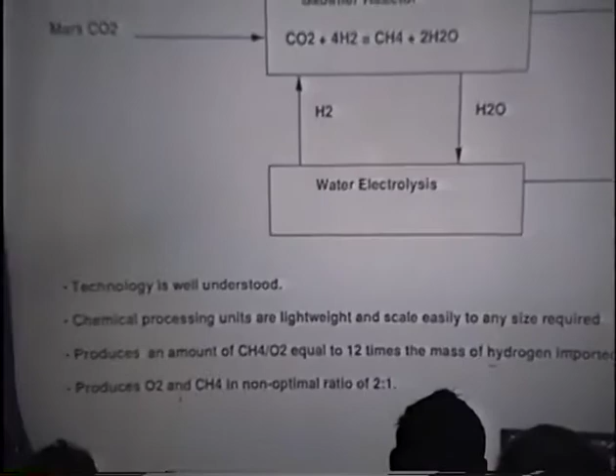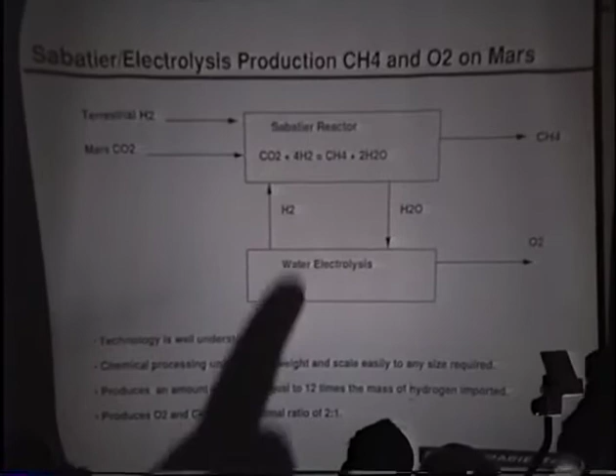So the process this is all based on is called the Sabatier electrolysis, or SE process. The essence of how it works is shown in this diagram. You take a small amount of hydrogen with you to Mars, and then you suck in the Martian air, which is 95% carbon dioxide. These two will react in what's called the Sabatier reactor, named after a chemist who lived in the 1890s, who did a lot of work with this. CO2 and hydrogen react to produce methane, natural gas, excellent rocket fuel, and water.

The methane you tap off and put in your fuel tank. The water you take and electrolyze, splitting it into hydrogen and oxygen. The oxygen that comes off is, of course, your oxidizer to burn the rocket fuel, and the hydrogen is recycled to make more methane and water, and so forth.

If you do this set of reactions alone, every ton of hydrogen brought to Mars will turn into 12 tons of methane-oxygen bipropellant on the surface of Mars. It's a leverage of 12 to 1, excellent, and it ends up with a specific impulse of 380 seconds. There are various tricks you can add to this system that can get the leverage up to more like 18 to 1. So that's the essence of it.

And just for purposes of understanding this, there is another leading candidate for in-situ propellant production, which a significant amount of work has been done on, called zirconia cells, which directly dissociate CO2 into carbon monoxide and oxygen. I understand there was a demonstration of such a device here on Thursday.

That will work. However, the problem with it is that it's much more energy expensive. This shows a direct comparison of the performance achieved in real machines by the two processes today. These numbers are our actual performances, and these numbers represent the best performances achieved at the University of Arizona, which is where the best zirconia cell work has been done.

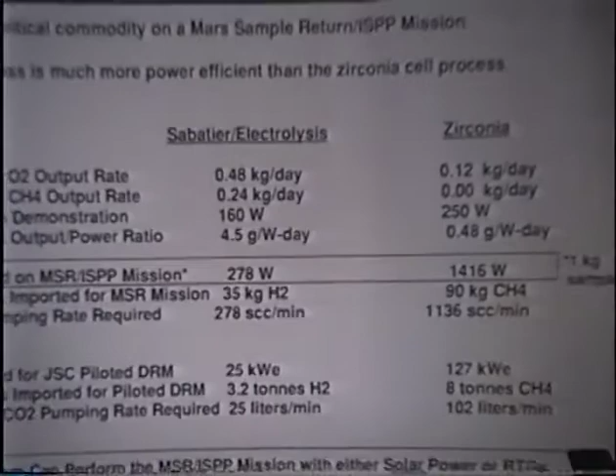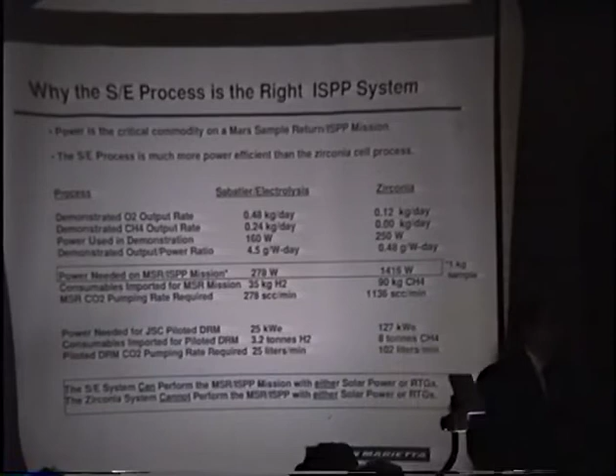If we were to go to a larger scale mission, like the Johnson Space Center's version of Mars Direct, their design reference mission, this process could do it for 25 kilowatts, which could be a small nuclear reactor. This would need 127 kilowatts, a much larger power system, posing significant difficulties compared to this. So that is why we chose to look at this process. Despite the fact that you have to transport hydrogen to Mars, the hydrogen is only a very small fraction of the propellant you generate, and the power consumption is reduced here by about a factor of 5, which is absolutely critical to make this a practical way of doing the mission.

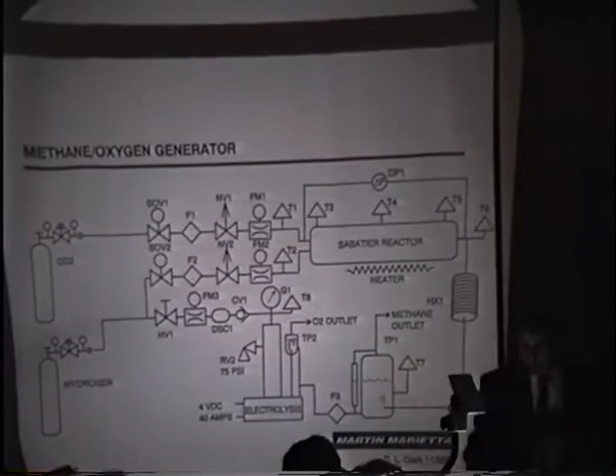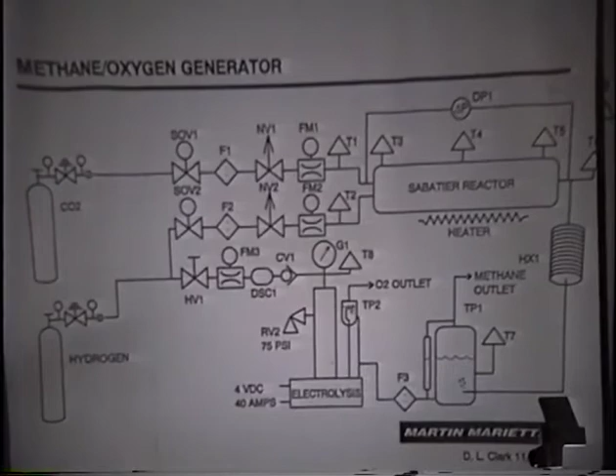So, let's talk about the demonstration work. I showed you the simplified diagram of what this is. If you get around to designing it, your diagram starts to get a little more complicated, and it starts looking like this. This was the design of our phase 1 system. There are 2 rounds of this work I'm going to report to you today. The first round took place in the fall, December 1993 through January 94, and the second round took place almost exactly a year later, in November, December 94.

In the first generation system, all we demonstrated was the actual chemical synthesis operation. We took CO2 and hydrogen directly out of compressed bottles, and we turned them into methane and oxygen gas. Then we sampled the gas to assess its quality and how much conversion we had achieved, and we just threw it away. That was the first generation system.

I might add that this was done on an extremely limited budget, $47,000 complete, and also on a 3-month timeline. It took us a month to design this, a month to wait for the parts to arrive in the mail, 2 weeks to build it, and we had 2 weeks of running time to demonstrate that it worked. This is faster, better, cheaper—much faster, much cheaper.

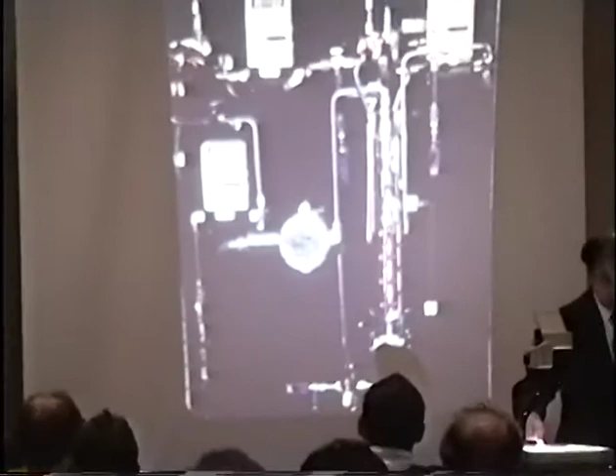So what does this stuff look like? Well, we built the Sabatier reactor from scratch, and it's shown here. This is a Sabatier reactor, 14 inches long and 2 inches in diameter, and it's about a little less than half filled with a ruthenium on alumina catalyst. These are nichrome heaters strapped around it, which you'd heat to around 300 centigrade to get it started. Then you input the gases, and at 300 centigrade they react well and produce heat.

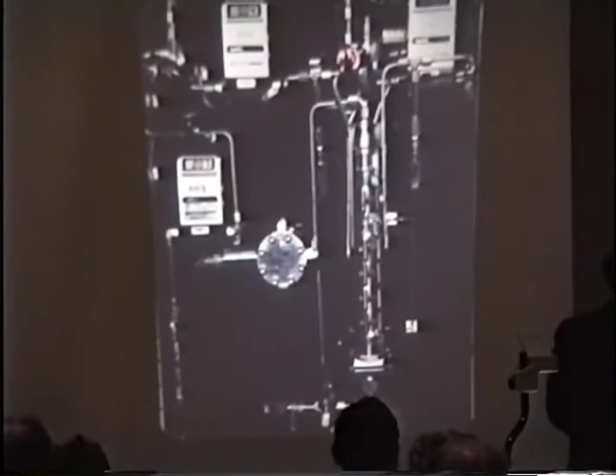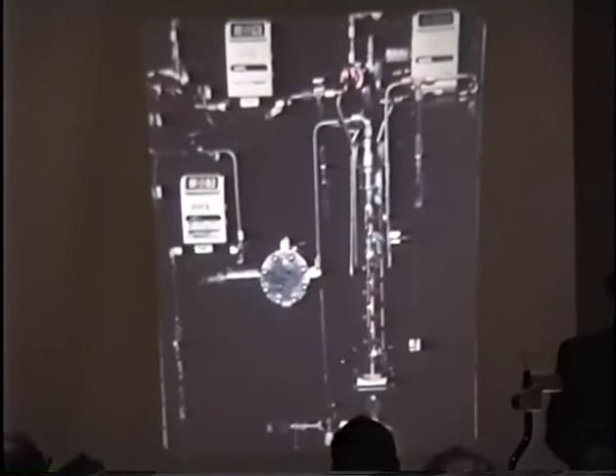Enough heat, in fact, to keep it pretty warm so that you can greatly turn down the power required to run it. Because we were on such a short timeline, we over-designed this system—by at least a factor of 10 in required volume. It's much bigger than it needs to be, but we didn't have time to rebuild it if we'd gone too small, so that's why it's as big as it is. Unfortunately, while that did guarantee it worked quite well, it made it so big that it had a large heat leak, so we had to keep some power in the heaters all during operation, around 50 watts.

Even after it was up and running, because it was so large. In our next generation machine, not the one I'm going to show you, but the one we're building now, we're going to make this about the size of a ballpoint pen—that's how much smaller it's going to be. It's going to be about the size of someone's finger. That person was a little taller than me. So here it is—that's the Sabatier reactor. These are flow meters for measuring the flow of hydrogen and CO2 into the machine and so forth.

The electrolyzer is shown here. This is actually the limiting thing on the production rate of the device. That Sabatier reactor you see there is, as I said, at least 10 times the size we require for our production rate. So it could be a lot smaller, or correspondingly, it could produce much more propellant than we're actually making.

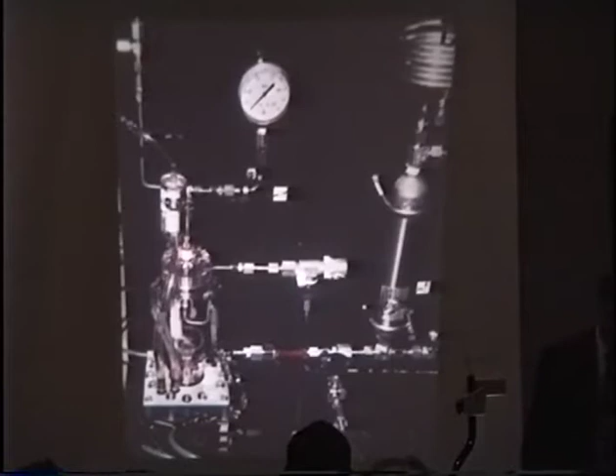This thing, though, is the electrolyzer. This is actually originally a Hamilton Standard electrolyzer, which later in life was put in a packaged instrument hydrogen laboratory source, only to be untimely ripped out of it by our technicians and put here. This thing weighs 3 kilograms wet, that is when filled with water. The Sabatier reactor you see there weighs around 10 kilograms, but I think it could be reduced to around 3.

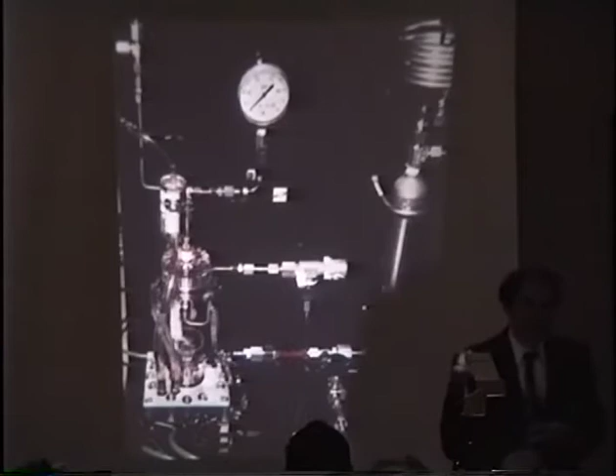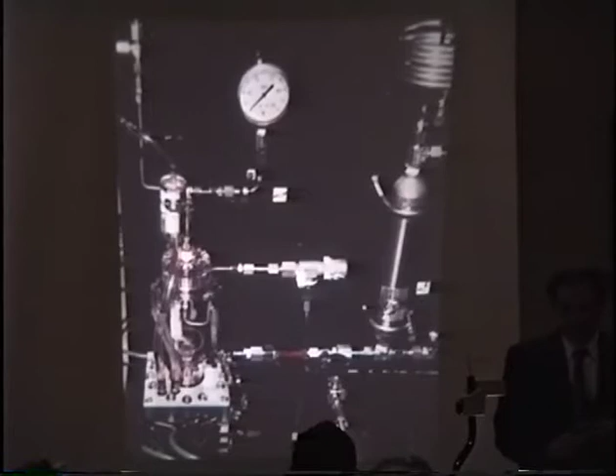This weighs 3 kilograms and uses 120 watts of power to produce the propellant we're making. That's a number you're going to have a hard time getting away from, because it's about 85% efficient. This is a small, elegant, and extremely sophisticated device. It's the product of hundreds of millions of dollars of your tax money at work for the Navy nuclear submarine program, and it can withstand very large shocks, including depth charging. So it ought to be able to take a mission to Mars.

And there it is. It's about 10 inches tall, 2 inches in diameter on the tower, 5 inches in diameter on the base.

This then is the whole machine, the phase 1 machine, shown here in the early stage of checkout.

As I said, the CO2 would come in here, the hydrogen would come in here. They mix in here to make methane and water. The water is condensed out in this condenser loop and accumulates in this water bottle. The methane would be tapped off to be sampled by a gas mass spectrometer or chromatography—we had both techniques. The water would then go through here into the electrolyzer to be split into hydrogen and oxygen. The oxygen could be tapped off and sampled, and the hydrogen would be recycled back in. So that is the core chemical system for a Mars propellant maker.

Later on, in order to reduce the amount of power needed to keep that Sabatier reactor in steady state, we just put some foam insulation around it, as you see here. There's foam around the Sabatier reactor.

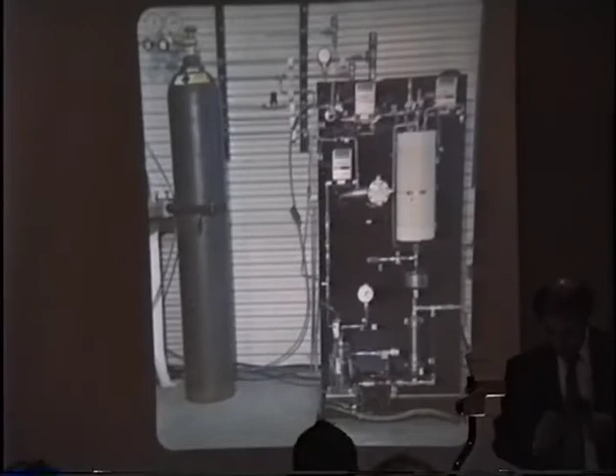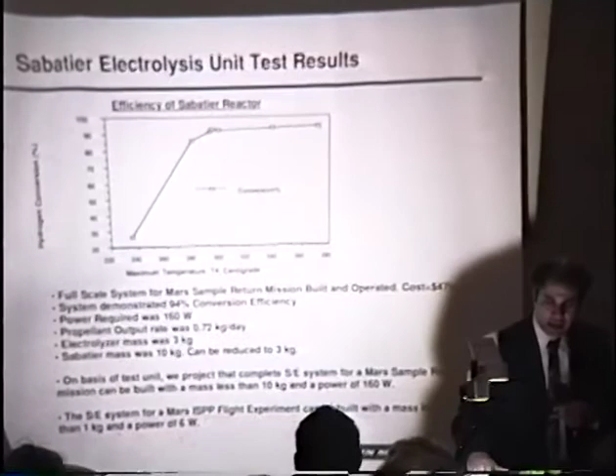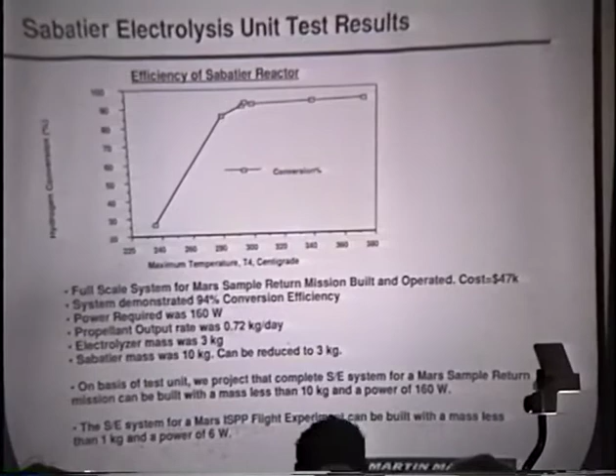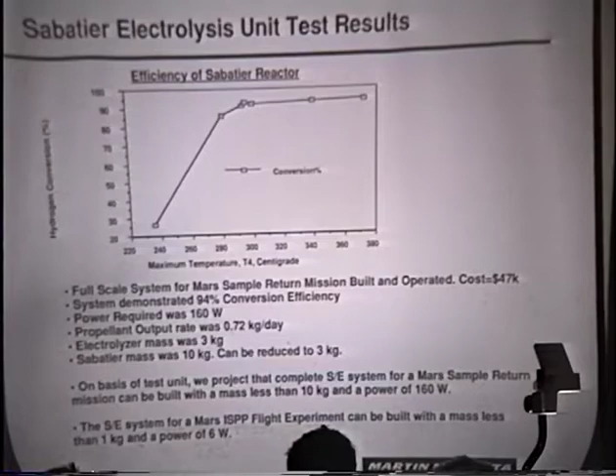This graph shows the yields we achieved as a function of the temperature of the Sabatier reactor, which we could regulate simply by adjusting the electrical heaters. In phase 1, we reached 94% conversion efficiency at a temperature a little over 300 centigrade, beyond which it did not improve much. That's because as you increase the temperature, while the reaction goes faster, the equilibrium favors less reaction, so it flattens out there. If you went below 280, the efficiencies dropped off rather sharply—it's just not hot enough to get the job done. But we got 94% efficiency.

Actually, we got 67% efficiency the first day we turned the machine on. By the end of the first week we were up to 85%, and by the end of the second week, when we ran out of money, we were up to 94%, because we were twiddling with the machine.

Because of the extremely accelerated nature of this program—in an aerospace company, with all the overheads you have, every hour of actual tech time you pay many times over—we simply could not afford to do certain things. The flow meter maker had said these instruments are guaranteed accurate within 2%. We took them at their word. We were getting some very strange results and couldn't understand it. There were alternate explanations, but I said ultimately those flow meters have to be wrong. The technicians refused to believe it. We calibrated the flow ultimately by bubbling water up into an inverted graduated cylinder immersed in water, and yes, they were off by 25%.

Once we recalibrated them, we were able to get the machine's yields up quite high. So that was phase one.

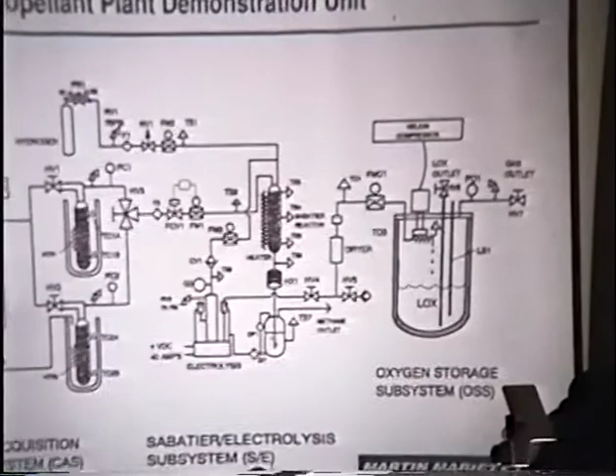But as I said, in phase one we had a simplified setup in that we were able to take the gas right out of gas bottles in compressed form, feed it right into the machine—spoon feed it, as it were—and we just released the propellant in gaseous state. Phase two began in the summer of '94, when we had renewed funding from NASA Johnson Space Center.

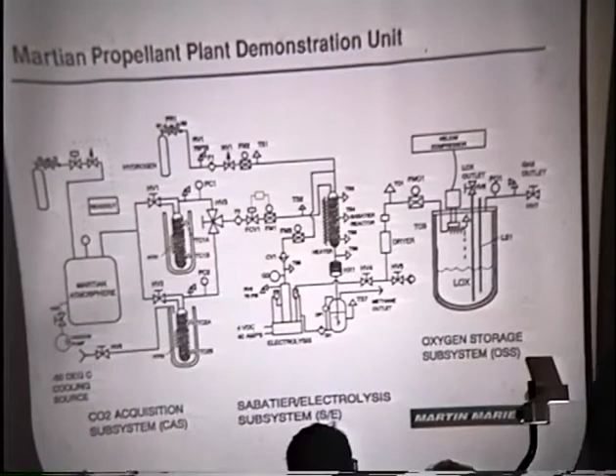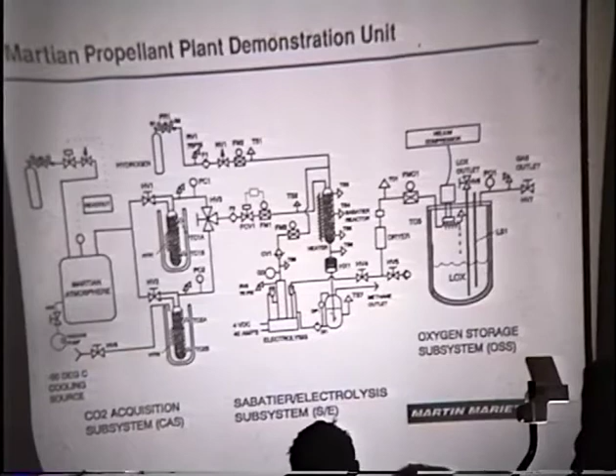David Kaplan was the program manager there. We augmented the machine considerably with devices that could actually acquire CO2 out of the Martian atmosphere—Mars atmospheric gas, with all its impurities, at Mars atmospheric pressure, less than 1% of Earth's atmospheric pressure, which makes things a lot harder. In addition, we liquefied the oxygen product. We could have liquefied the methane too with an identical setup, but we didn't have the budget for that, and in any case liquefying oxygen is actually a bit harder. So you could do one, you could do both. This became now a true end-to-end system.

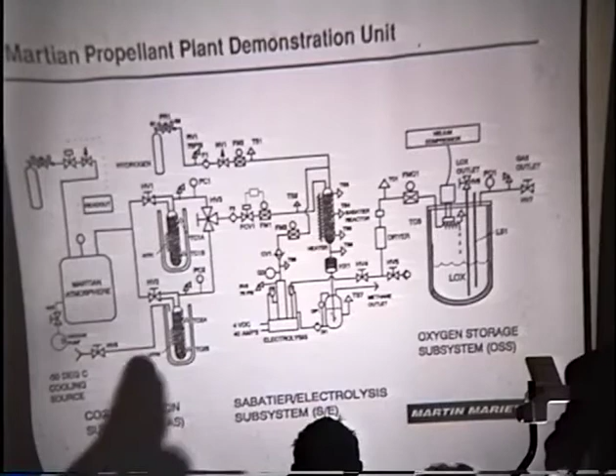Now, originally we were going to use a simple mechanical pump called a roughing pump, which you can buy out of a catalog, to gather the CO2 out of the thin Martian air, compress it down to one standard Rocky Mountain atmosphere of 12 psi, and feed it to the Sabatier reactor.

And that would certainly work. The problem was all the pumps you could buy out of the catalog that could do this at the required rate weighed on the order of 15 kilograms and used over 200 watts.

Now, that's not to say those pumps can't be made lighter and more energy efficient, but they're not, because there's currently no incentive for people making a laboratory roughing pump to reduce its power consumption. If it uses less than a kilowatt, no one cares in a terrestrial lab, and it doesn't really matter that it weighs 30 pounds. Whereas it mattered to us.

So we had an idea to take a very different approach, which we tried under company money to experiment. This was called sorption pumps, which is basically a can that you fill with an absorbing medium, of which two examples could be zeolite, a mineral very popular for this purpose that likes to absorb gases, or alternatively you can use carbon, like in a fish tank filter system, which is a more old-fashioned way to go about it.

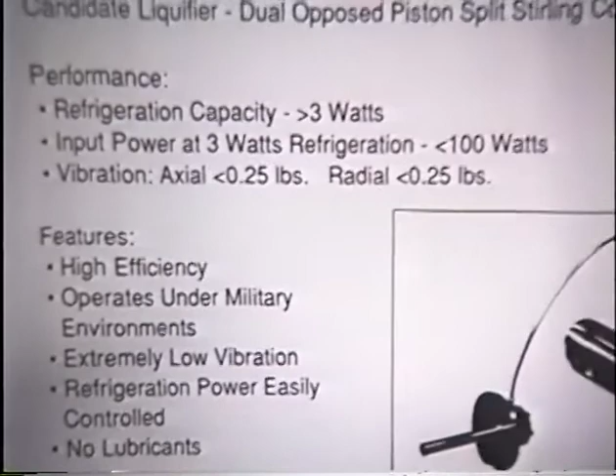But we discovered that a company, Magnavox actually, was currently making a run of small coolers for military tactical sensors, Stirling cycle coolers. This thing here is about 1.5 inches in diameter and 8 inches long, and it weighed 1.6 kilograms, 3 pounds. And it had all the refrigeration capacity needed to liquefy either our oxygen or our methane product. And it cost $10,000.

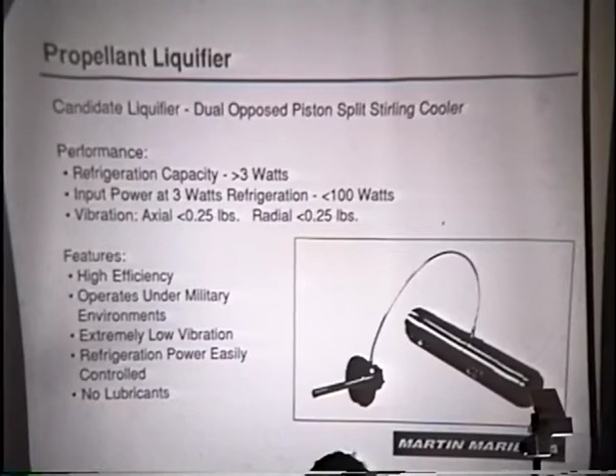It's a mil-spec item, which is pretty good, but it's a direct analog of a thing that TRW makes, which is exactly the same, but costs $600,000, and is space rated, and is going to fly in a mission critical role on EOS in the late 90s. So this is technology that can actually fly to Mars, and it's quite compact and elegant. And that was our refrigerator.

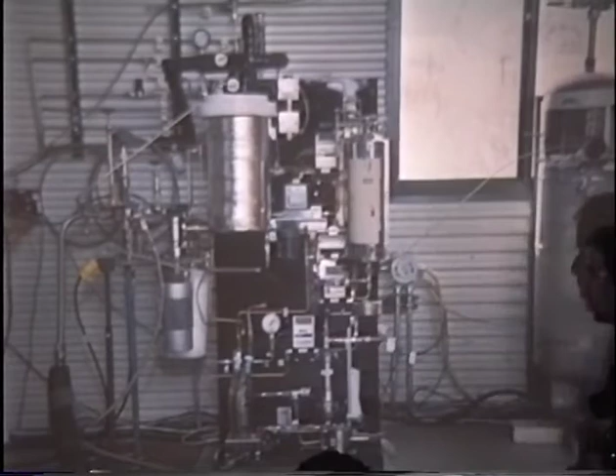And on this one, we had online chemical analysis of the effluent stream. On the old one, we actually had to take a grab sample and drive down the hill to the chemical lab and have them analyze it, and then tell us the next day how good you were doing, which is rather tedious. This one, you can just look on a computer screen and see right now you're getting 96% conversion, and you know this is the trace gases. So that was better.

Once again, there's the dewar, there's the refrigerator, roughly the size of a Coke can. These are the sorption pumps. They were 1 liter, 1 quart each.

Okay, and we would cool them with cold nitrogen gas to bring them down to Mars atmospheric temperatures, and then they'd be exposed to the Mars atmospheric reservoir, and we just suck the thing in, just like an extremely dry sponge sucking in water.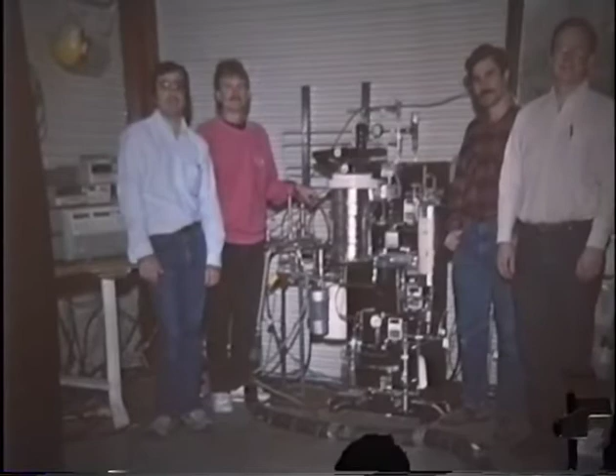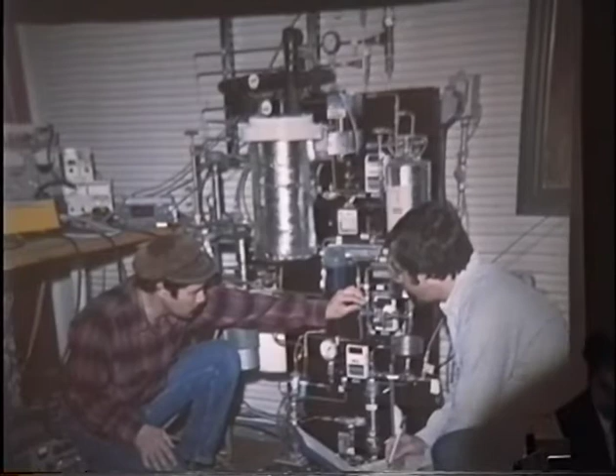Initial checkout of the system. And that's Larry Mason. He was the lead chemist. I was the lead engineer on the program.

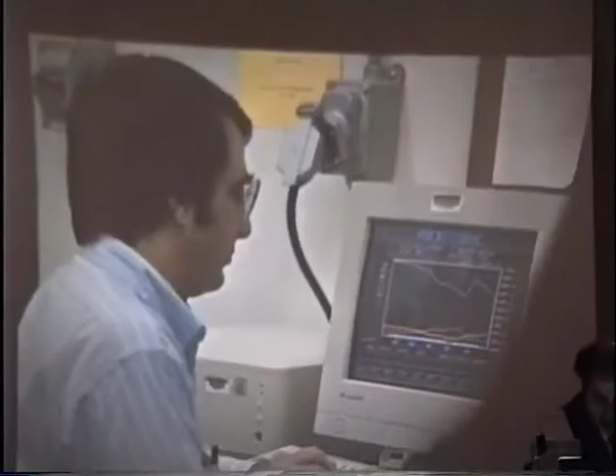We had an online system to analyze what was going on. It's Larry Clark, the lead technician, in which you could look at how much power the electrolyzer was using in the Sabatier, and what the flow rates were, and the pressures, and all these conditions on the machine. And we also, as I said, had online analysis of the chemical output. So I got a lot of data here.

Basically, the sorption pumps required around 50 watts each, to run one or the other when they were being heated. But we could probably get that number down a lot, because the way we built them, we wrapped the heaters around the outside of the cans. If you put the heater inside the can, we wouldn't waste as much heat, and the power would come down a lot. The other advantage of the sorption pumps is they have no moving parts except for valves to open and shut them. There's no whirling fans or pumping pistons or anything like that. So they're really quite reliable.

And they absorb CO2 in preference to nitrogen or argon, so they purify the gas before it goes into your machine. You take in Mars gas, and out comes pure CO2. Nitrogen is rejected, because in a sorption pump, the less cryogenic a gas is, the faster it absorbs. So on Mars, the thing we want to absorb first is water vapor, except there is very little of that. To the extent you could get any of that, that'd be nice. But beyond that, the next thing we want to absorb is CO2. And then after that, argon and nitrogen. So it has a preference.

So once again, 50 watts in our current setup, but I think that could be cut down a lot. And one idea we have is actually putting the Sabatier reactor inside the sorption pump, which will be possible after we miniaturize it. Then the waste heat from the Sabatier reactor will be able to heat the sorption pump, and be able to run it with no power at all.

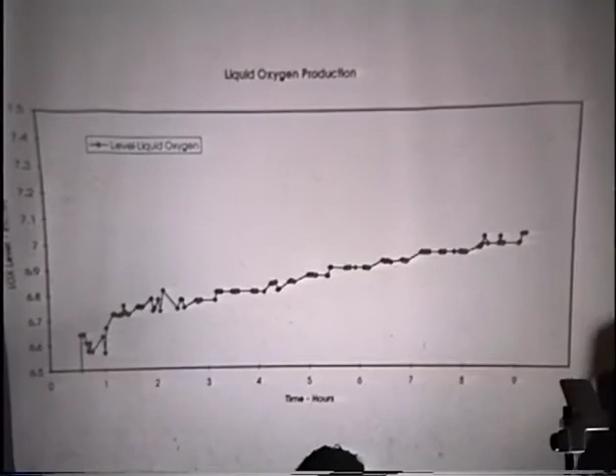This plot shows the oxygen level building up in the dewar. And this is the total power, which was around 300 watts for the whole machine on average.

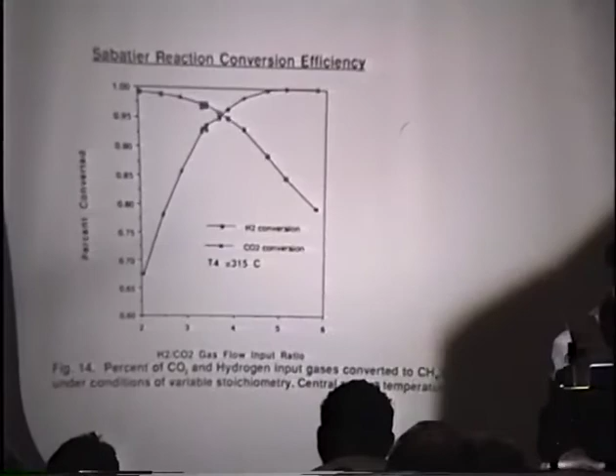The conversion efficiency—you can get different conversions as a result of turning the knob on whether you want extra hydrogen or extra CO2 going into the machine. We could get 96% conversion of both at the same time, or if we ran with extra hydrogen, we could get 99.9% conversion of CO2. Or if we ran with extra CO2, we could get 99% conversion of hydrogen.

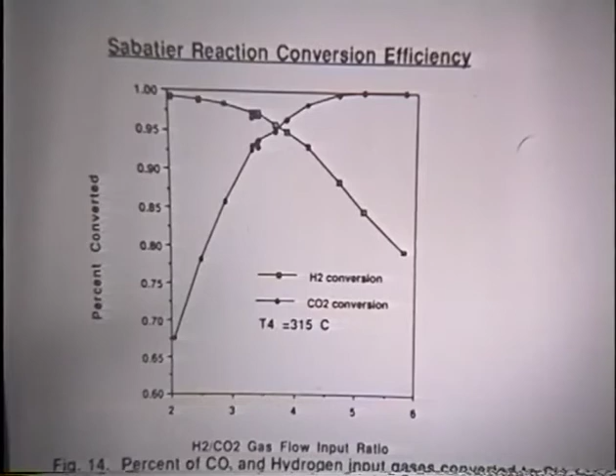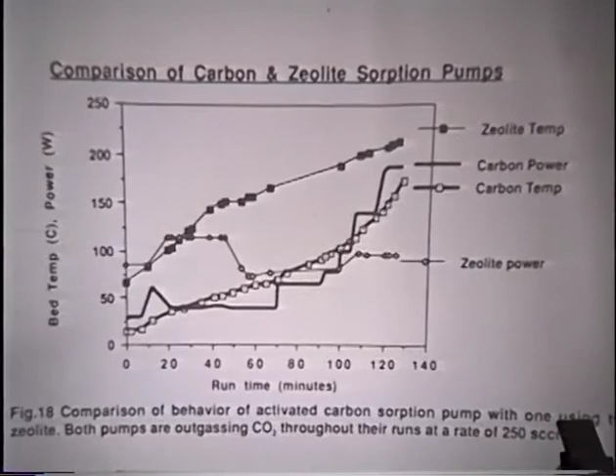Interestingly, we did some experiments. What happened was, to be accurate, we ruined one of our absorption pumps by letting some silicone get in, which got melted and ruined some of the zeolite. The vendors who make the zeolite, fancy chemical companies, said they could have some delivered in 2 months, provided we got the order out that week, which of course would not happen. It was hopeless. So we decided to try some activated carbon, which we got at the pet store, and it outperformed the zeolite by 2 to 1.

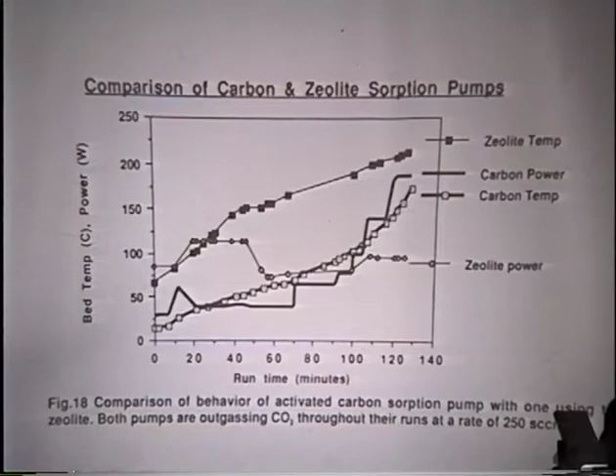This was the higher grade activated carbon, the $5 can stuff. So you want to use the better stuff.

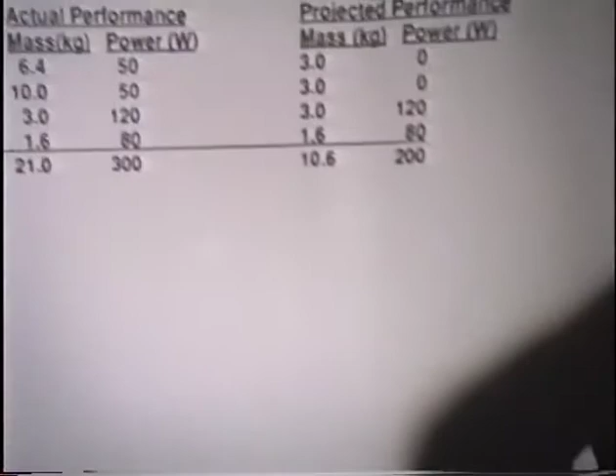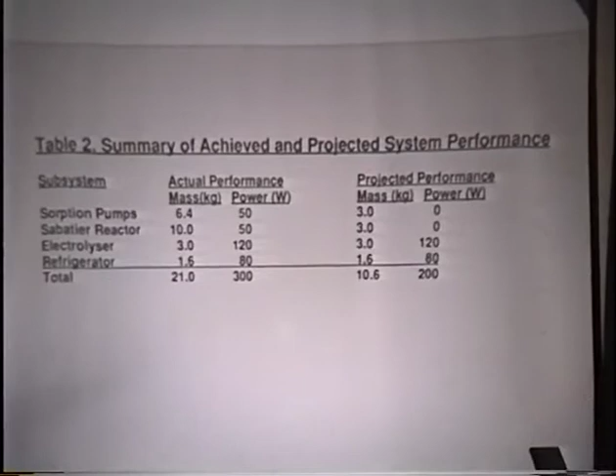This is the summary of achieved performance. You can see the sorption pumps had a total mass of 6 kilograms. They used 50 watts. We believe their mass can be reduced to about 3 kilograms and use no power, because we think we can use the waste heat from the Sabatier reactor.

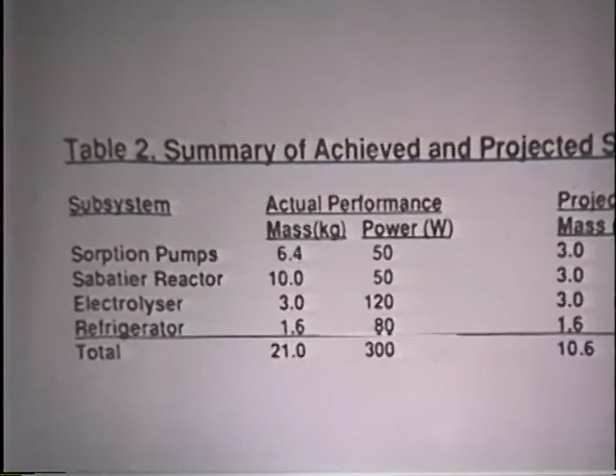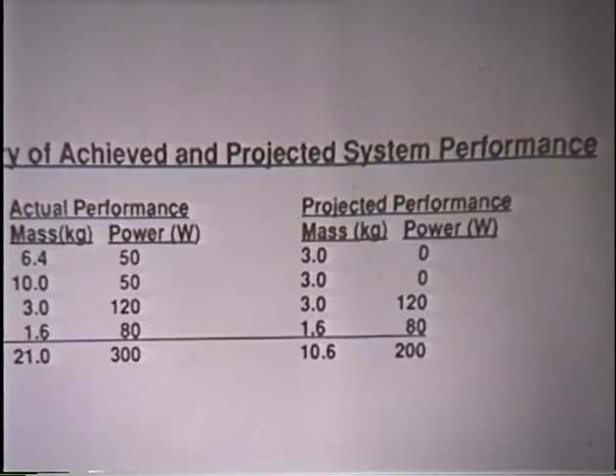The Sabatier reactor took 10 kilograms and used 50 watts. Here I'm saying we can cut it to 3 kilograms—that's extremely conservative, I think we can cut it to less than 1, and no power. The electrolyzer weighed 3 kilograms and used 120 watts, and I don't believe that can be substantially improved.

The refrigerator weighed 1.6 kilograms and used 80 watts. On Mars, I think it would be the same, even though we have to refrigerate the methane as well because of the colder environment—we'd be able to get both of them with one refrigerator.

Now, as I said, this machine was actually sized to do a sample return mission, and it is. In fact, it's 50% oversized against this mission design that you see here. This is a mission which could be launched on a Delta or perhaps even a Med-Lite, which has half the capability of a Delta.

We throw the spacecraft on direct trans-Mars injection. It does a direct entry at Mars, lands on Mars, and makes propellant there in 500 days. Then it ascends, comes back, and does a direct entry at Earth. It's picked up on the ground in a cornfield in Kansas.

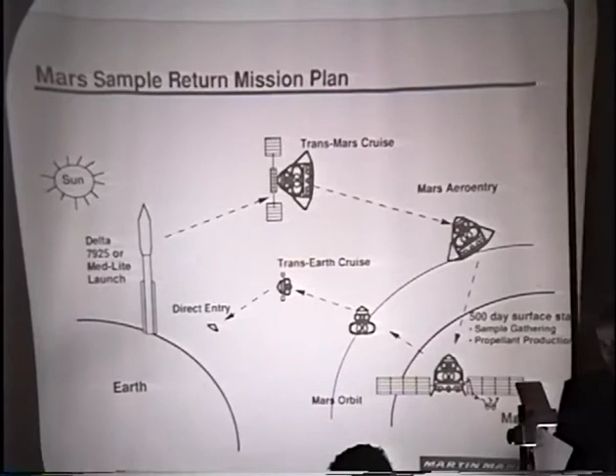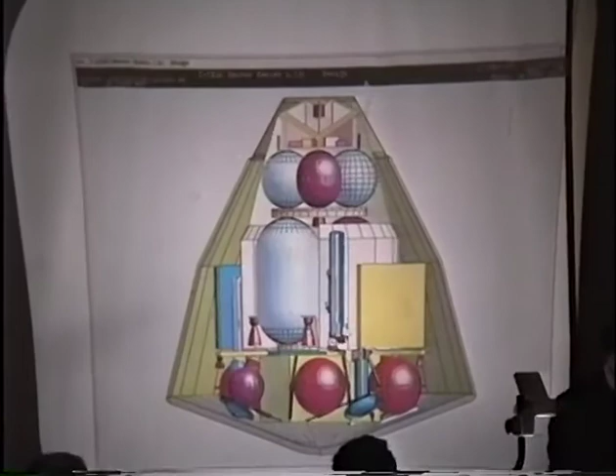Or any place like that. This is the spacecraft in the little capsule, and that is actually sized to a Med-Lite shroud, a little smaller than a Delta shroud.

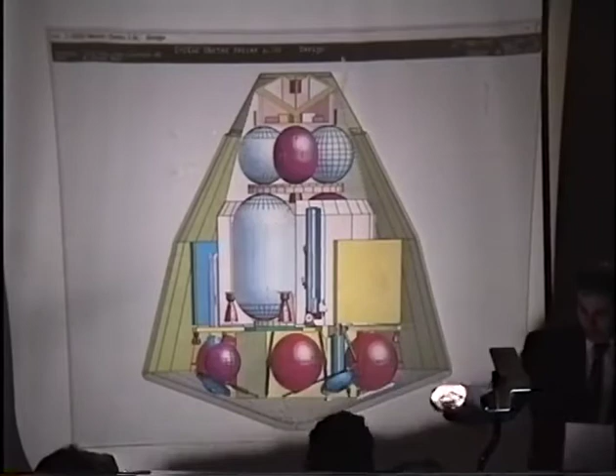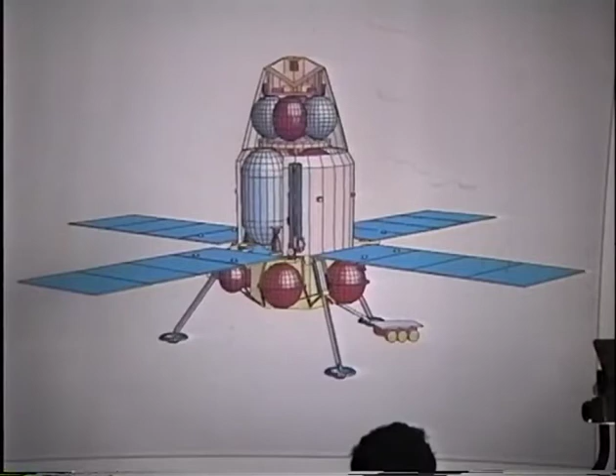Spacecraft on Mars. We did a formal costing of this mission, not a swag, but a detailed costing in the way that we would actually cost the mission that we would fly, because this is a mission that we would fly. This thing is actually using a Mars Surveyor lander. You may know that Martin just won the contract to fly the Mars Surveyor landers in 1998, land on Mars, and all the follow-on landers.

This is an actual Mars Surveyor lander, except the ones we're flying now have just 2 panels—this adds another 2 panels. So we're using the same lander that we're using for the Mars mission we're flying in 1998. That's the magic of making propellant on Mars: we can reduce the mass of a direct return spacecraft to the point where it's light enough to land on this puny little lander we're building for the 1998 mission.

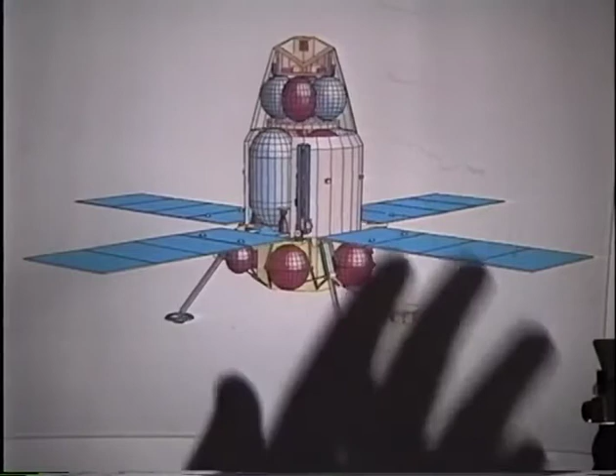The actual power requirement of this mission is around 160 watts. So in fact it could be met with solar power, although I feel it would be much wiser to do this mission with an RTG, or any long-duration Mars mission with an RTG, because of the possibility of sand and dust getting on your solar panels and obscuring them, degrading their performance. But we're going to learn that lesson in 1996 with Pathfinder, and I think after that we'll be able to go back to RTGs. But for now, it shows it could conceivably be done with solar power.

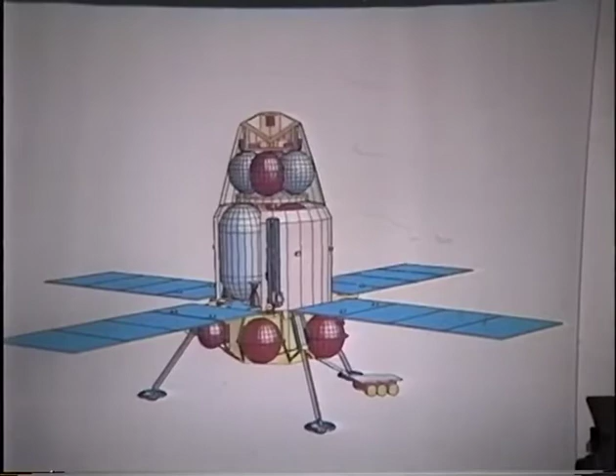In any case, here it is. We did a formal costing of this, with a redundant spacecraft—everything is redundant as we would actually build a spacecraft. The total cost of this mission, including launch and flight operations, is $300 million, which is notable because a Pathfinder mission is in fact around $200 million and is much less potent scientifically than this.

Now, if we went with a single-string spacecraft, we can get the mass of this mission down low enough to fly on a Med-Lite. The spacecraft is also cheaper, and as a result, the cost of that mission was around

$260 million or so. And in fact, both of those missions could also be flown on a Russian Molniya, which is a much cheaper launch vehicle with about the same capabilities as Delta. That would reduce the cost of the dual-string mission to $260 million and the single-string mission down to around $230 million.

These are extremely affordable numbers for what amounts to the premier Mars planetary mission of the whole science community, and one which would also prove the validity of making your own fuel on Mars so that we can use it on a Humans to Mars program.

And I might add that flying this on a Delta, you have an 85% mass margin with a dual-string spacecraft, and more than 100% mass margin with a single-string spacecraft. So there is absolutely no doubt that this can be flown on a Delta.

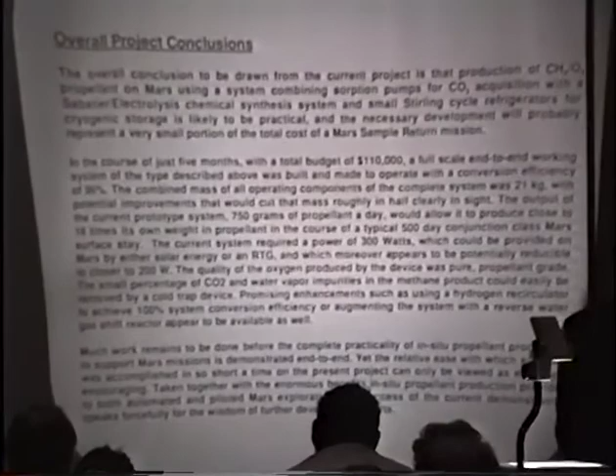This pretty much winds it up. This whole program that I showed you was done for a total cost of around $110,000 between both phases, which is ordinarily the amount of money spent on a study, drawing some view graphs and so forth. And yet we were able to make this thing work, achieve 96% efficiency, demonstrate some new technology even in the course of it.

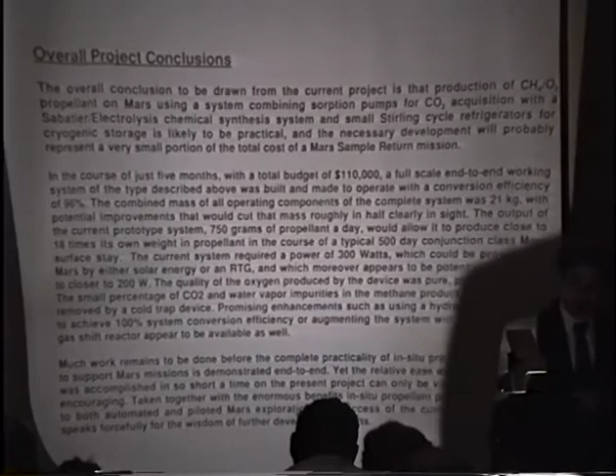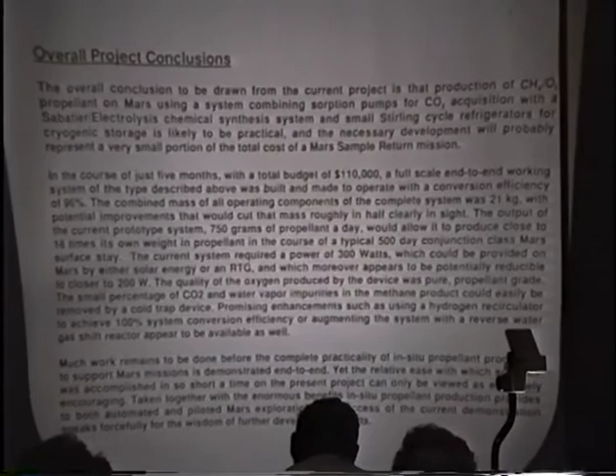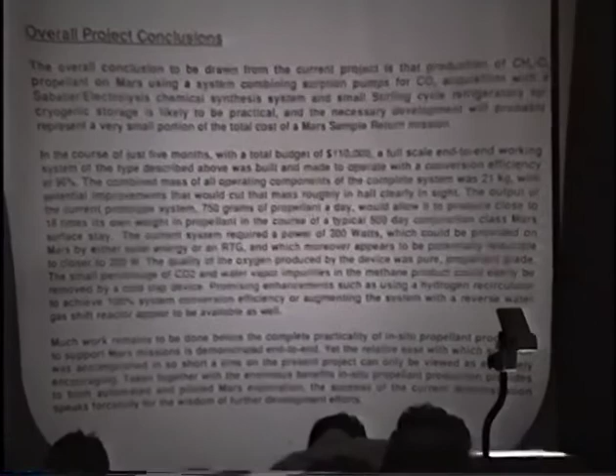The point is that the fact that we could do this and make this work on this kind of schedule with this kind of money proves that it's easy. It is not hard, it is easy. And if real chemical engineers were doing this, it could be done much smaller, lighter, cheaper, and not 96% efficient, but 99% efficient. In other words, the basic conclusion is that this will work. Thanks.